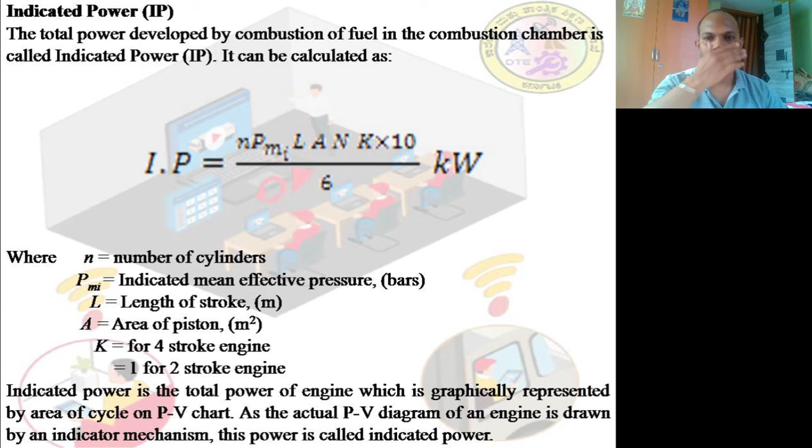Now, indicated power is the total power of the engine, which is graphically represented by the area of a cycle on the PV chart, as the actual PV diagram of an engine is drawn by the indicator mechanism. This power is called the indicated power. Is it clear? So this is very important.

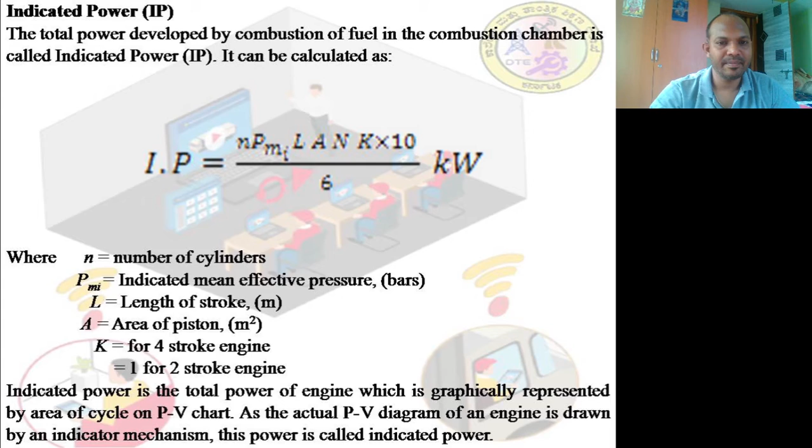Among all power which is being developed in the engine cylinder, indicated power will be the maximum. That is the reason why we call it an ideal power. Now let us go to the brake power. In the brake power, what happens? The power available at an engine output shaft is called its brake power. The power which is generated in the engine cylinder is nothing but indicated power.

The power available at an engine output shaft, by the time it comes to the output shaft, will be reduced because of the friction, because of the load, because of mechanical inaccuracies, because of the heat which is being generated, because of the transmission losses. So there are n number of factors which make the indicated power be reduced when it comes to the output shaft. So that is what we call the brake power.

It is the power which can be positively used against a resistive force or braking force of the applications for which the engine is being used. It can be calculated in two ways. One expression is BP, the brake power, is equal to 2 pi N T divided by 60,000 kilowatts. This is one expression, where N is the engine speed.

It is the engine speed, the speed of an engine in terms of revolutions per minute. That means how much the engine is rotating every 1 minute, what is the number of revolutions it is making. And then T is nothing but torque. Torque, you are already familiar with. The force times the distance of length is nothing but the torque. So T is the torque at the output shaft, which is given in Newton meters.

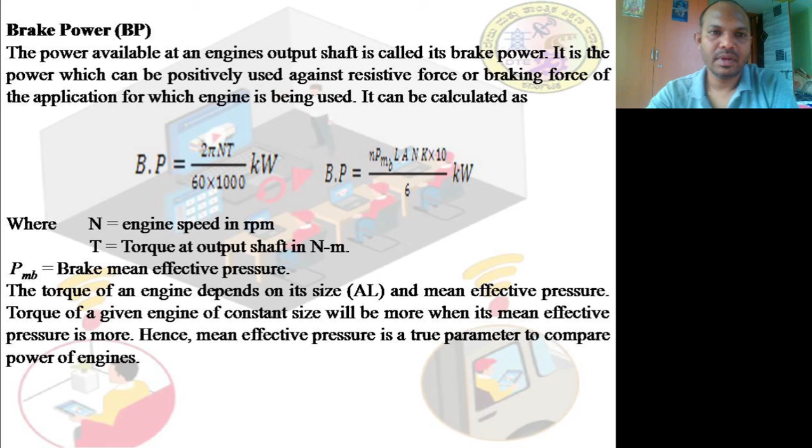Hence, mean effective pressure is a true parameter to compare the power of engines. This is an important factor which plays a major role. So, compared to the indicated power, common sense itself says the power which is generated inside the engine and the power available at the engine output shaft are different. Common sense says this power at the output shaft is less compared to the ideal indicated power. Okay, these are the two important performance parameters.

Next one is frictional power. So indicated power is so much, and then the power which is available at the engine shaft end is different. In the engine it is different and at the shaft end it is different. Where is the loss of this power? The difference in this power is nothing but frictional power.

It is the power required to overcome the internal friction of the engine. It represents the total losses occurred from indicated power. It is the difference between indicated power and brake power. Is it clear? So that is the one.

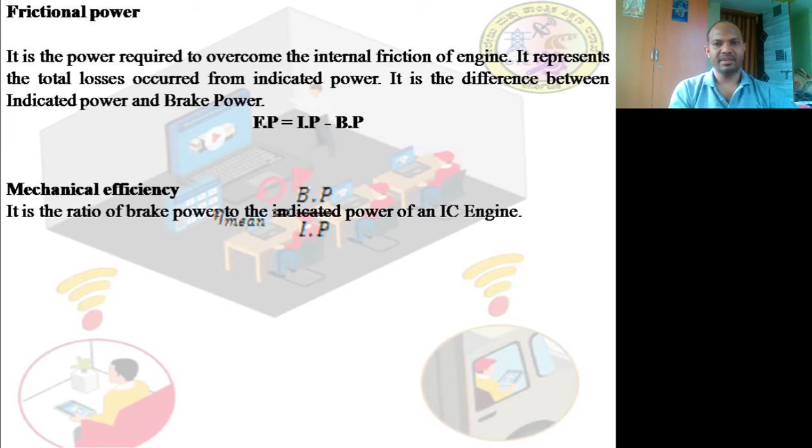The next one is mechanical efficiency. It is nothing but the ratio of brake power to the indicated power. The ratio between brake power to the indicated power is given as the mechanical efficiency. Is it clear? That is nothing but mechanical efficiency.

Now let us talk about indicated mean effective pressure. Indicated mean effective pressure is defined as the hypothetical pressure which is thought to be acting on the piston throughout the power stroke and does the work equal to the mechanical work generated per cycle of the engine.

It is called indicated mean effective pressure as it is usually determined with the help of a PV diagram taken with an indicator mechanism. The area of the PV diagram drawn by the indicator mechanism can be calculated by any measurement method. Then the indicated mean effective pressure can be determined by Pmi equals net area of diagram in mm square divided by length of the diagram in mm, times spring constant in bar per mm. So that will give the mean effective pressure.

Basically, the mean effective pressure relates to the actual power generated in the engine cylinder, which cannot be calculated with instruments. This is a quantity related to the operation of an engine and is a valuable measure of any engine's capacity to do work that is independent of the engine displacement.

As the last paragraph said, the power actually depends upon the speed as well as the size of the system. So specific output is given by BP divided by A into L, where A is the area and L is the length. This also equals a constant into BMEP into N, the revolutions per minute, which gives you the specific output. Is it clear? That is the beauty behind it. And then we also have the volumetric efficiency.

Mechanical efficiency is nothing but BP by indicated power. I'm so sorry, so brake power divided by indicated power. Whereas the volumetric efficiency is always given by actual volume of charge supplied at normal temperature and pressure divided by swept volume. It's the actual volume of charge that is being sucked.

The suction during the suction stroke: the actual volume of charge which is being sucked divided by the swept volume will give rise to a volumetric efficiency. I once again define. It is defined as the ratio of actual volume as reduced to normal temperature and pressure of the charge or air drawn in during the suction stroke to the swept volume of the piston.

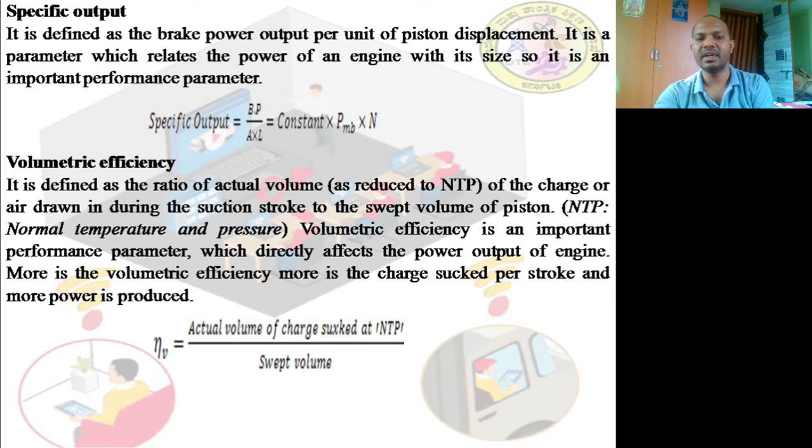Higher the volume that is being sucked, the higher the efficiency. If you are getting more fuel for the combustion, then you will get more energy. Less fuel you are getting, so obviously less energy will be produced. So that is why volumetric efficiency directly influences the power output.

Fuel air ratio. Now the fuel air ratio is the ratio of mass of the fuel to the mass of the air in the fuel air mixture. Sometimes it may be given as air fuel ratio, AF, capital A and capital F. The mass of the air to the mass of the fuel will always play a vital role.

My dear friends, I was just talking about the petrol engine. In the petrol engine, the air and the fuel will enter into the engine cylinders. Correct? Now, that is what we call the air fuel ratio. It will be mixed in a carburetor. Carburetor is a place where the petrol and the air will be mixed. How much of the petrol and how much of the air has to be mixed?

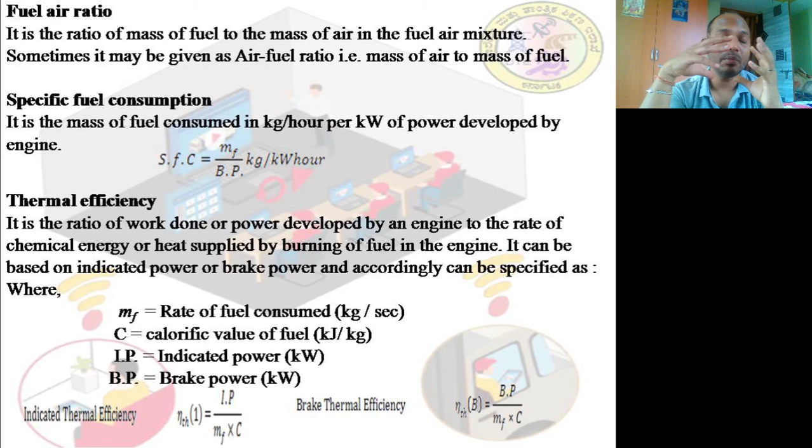So basically the stoichiometric mixture for a gasoline engine or a petrol engine, the ideal ratio, is 14.7:1. That means if you take 1 unit of fuel, there must be 14.7 units of air required. That means if you want to burn 1 unit of fuel, then you need 14.7 units of air, which makes it burn completely for a petrol engine.

So mixing of this will always take place in a carburetor. The carburetor's duty is to mix this petrol and air, and it can be decided by this petrol and air mixture combination. This also plays a very major role when it comes to the diesel engine. The stoichiometric ratio varies: 14.7 is to 1 for a petrol engine and 14.5 is to 1 for a diesel engine, which gives you an ideal combination of these two things.